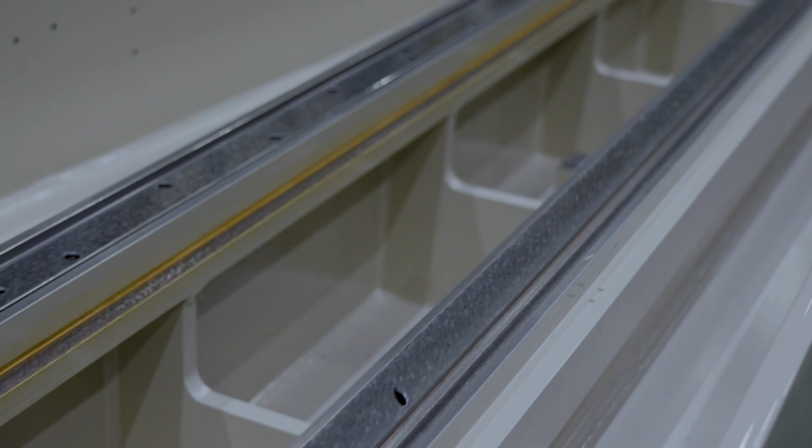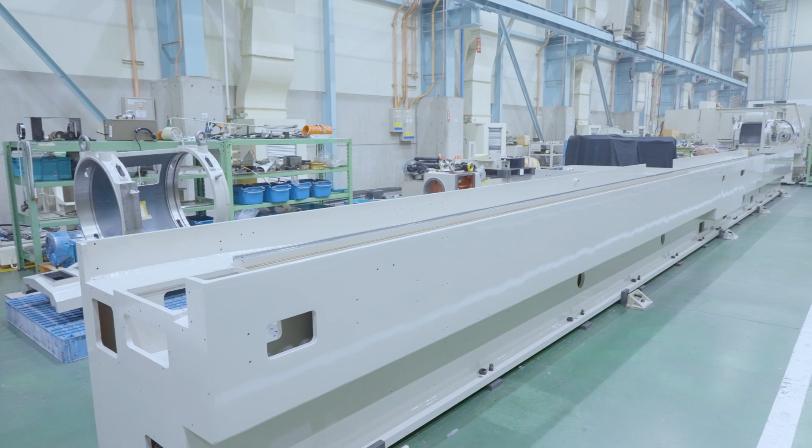The scrape surface seems to go on forever. This is the GSE 500A thread grinding machine with a sliding surface that is an exceptional 12 meters long. Despite this length, the GSE 500A achieves axis straightness to the micron level.

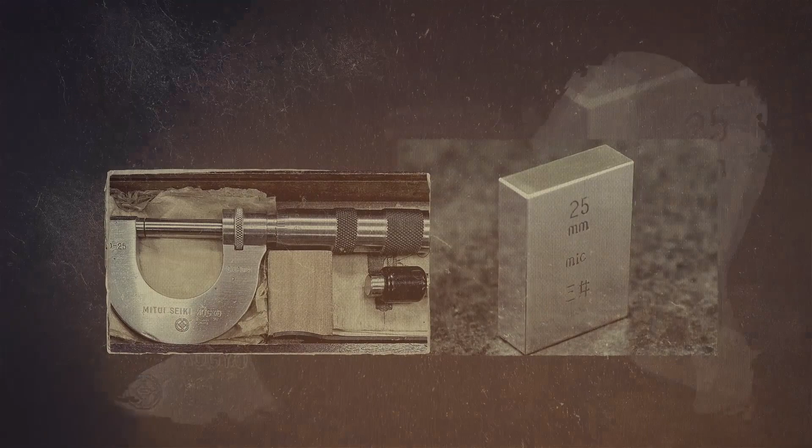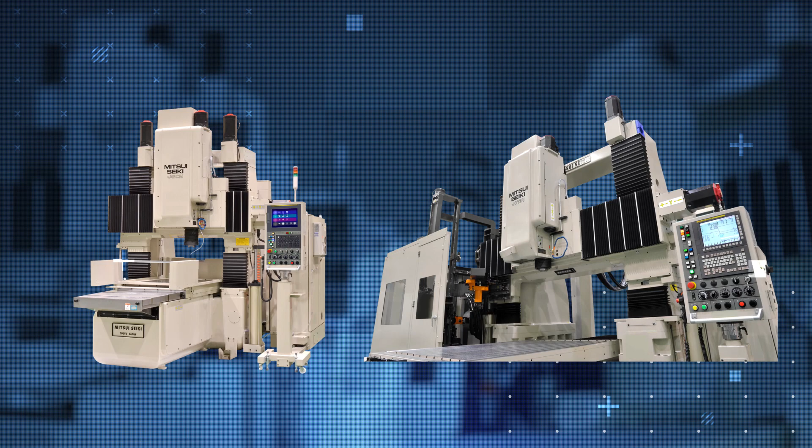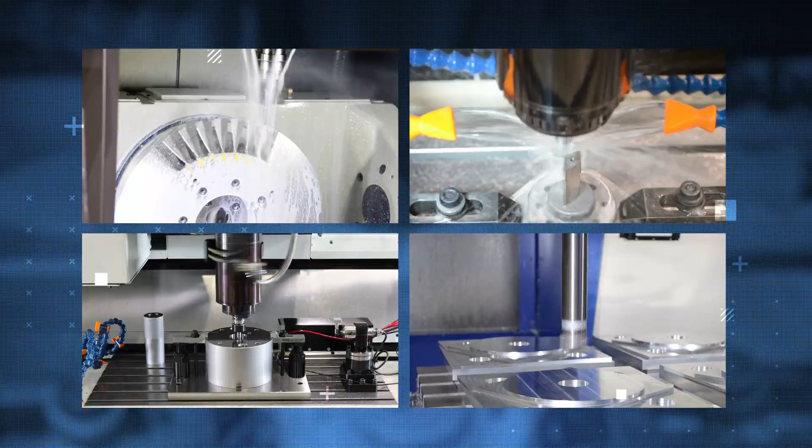MITSUI SEIKI Kogyo Corporation Limited started out producing measuring instruments such as gauge blocks and now produces various types of mother machines, meaning precise machines that facilitate making other precise machines. This includes the world-leading jig borer, the pinnacle of metal cutting machines. How are these mother machines made? Let us introduce our technology and techniques.

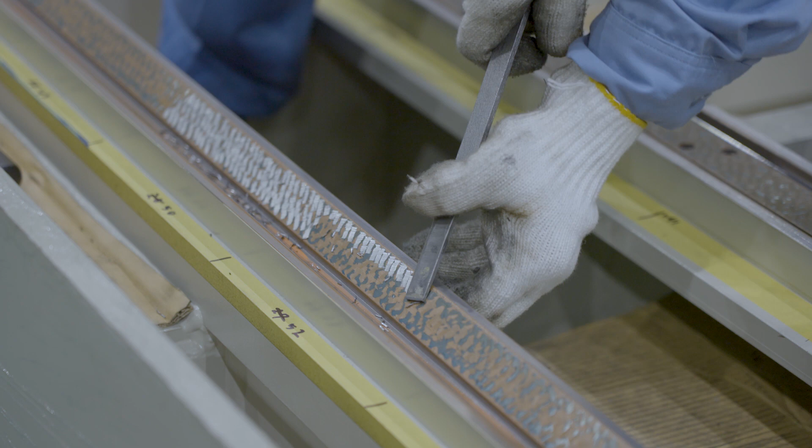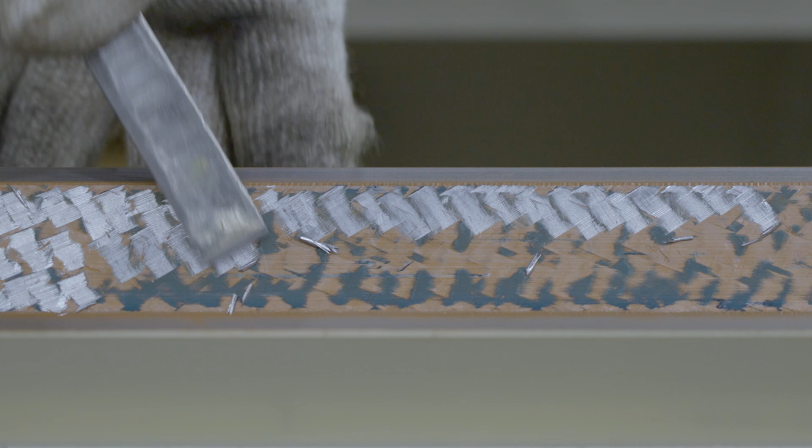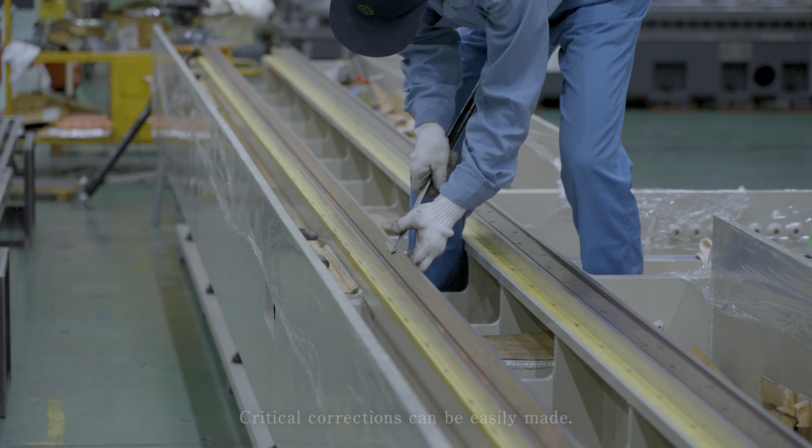Scraping is the process of manual fine machining of the surface of machine components by using a chisel-like tool. The amount that can be removed at one time by scraping is about 1 to 3 micrometers. As we know exactly how much material needs to be removed, we can precisely create any shape. Unlike conventional machining, the major benefit of the hand scraping process is critical accuracy corrections.

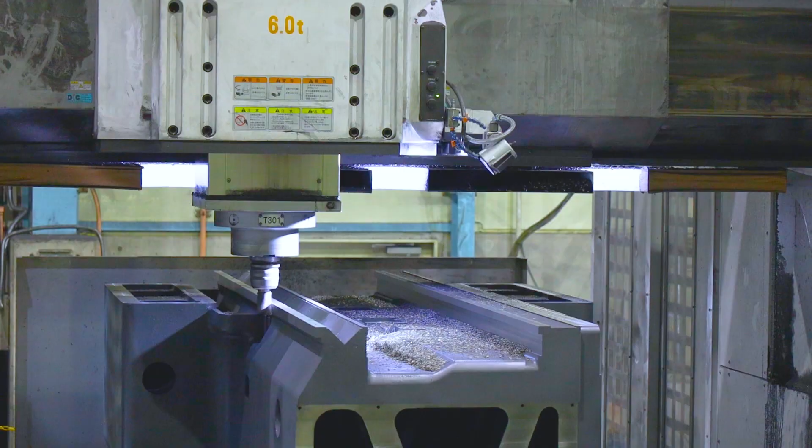Simply saying, the reason for performing scraping is to create components that are better than the machine that made it. The precision of a part cannot exceed the precision of the machine that processes it. Only by applying the human skill of hand scraping is it possible to create something that exceeds the precision of the processing machine.

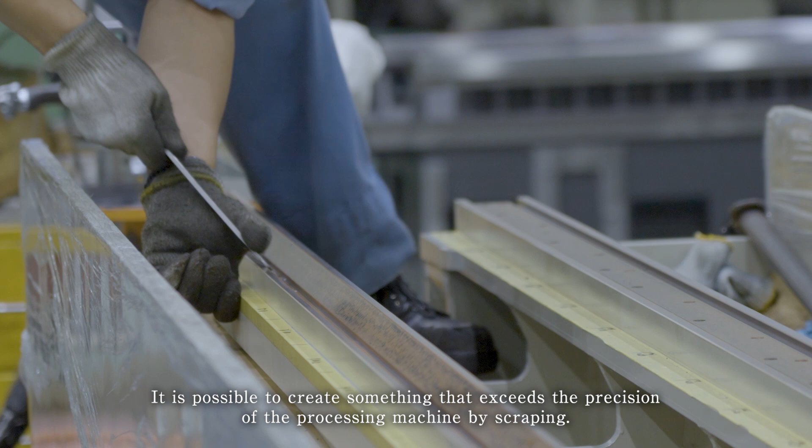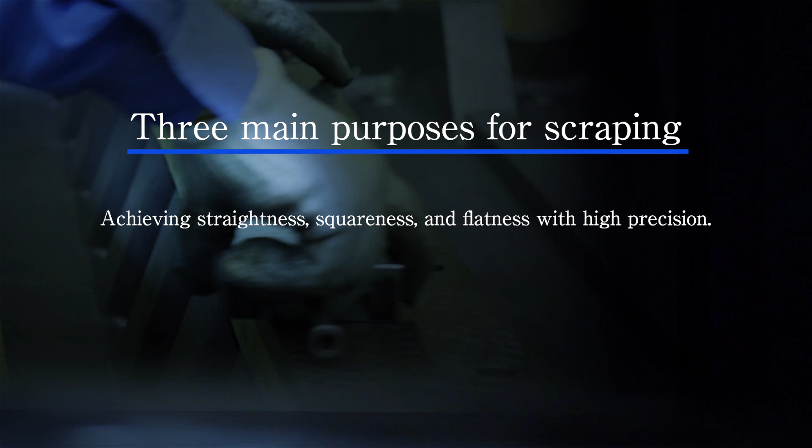There are 3 main purposes for scraping: achieving straightness, squareness, and flatness of sliding surfaces with high accuracy; creating a surface that takes deformation into consideration to accommodate displacement due to the weight of the parts placed on it; and creating surfaces that allow parts to be joined together without deformation when these are joined together.

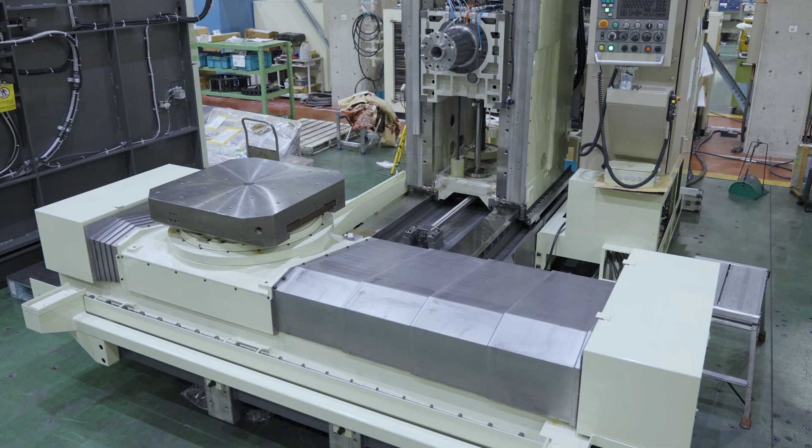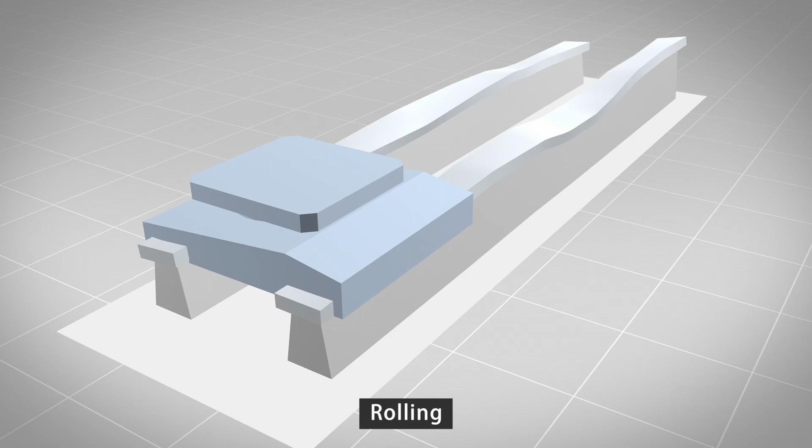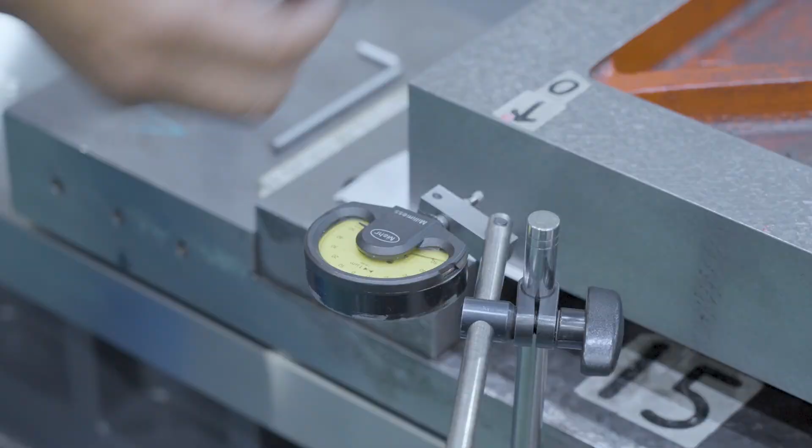When an object, such as a table, saddle, or column, moves on a linear axis, there are slight differences in posture in the up-down, left-right, and front-back directions. If a sliding object, which should normally move in a straight line, moves incorrectly, it cannot be called a high-precision machine. The accuracy of an object moved on a linear axis is determined by the accuracy of the sliding surface. The sliding surfaces of all the machine tools produced by us are hand-scraped to minimize posture differences.

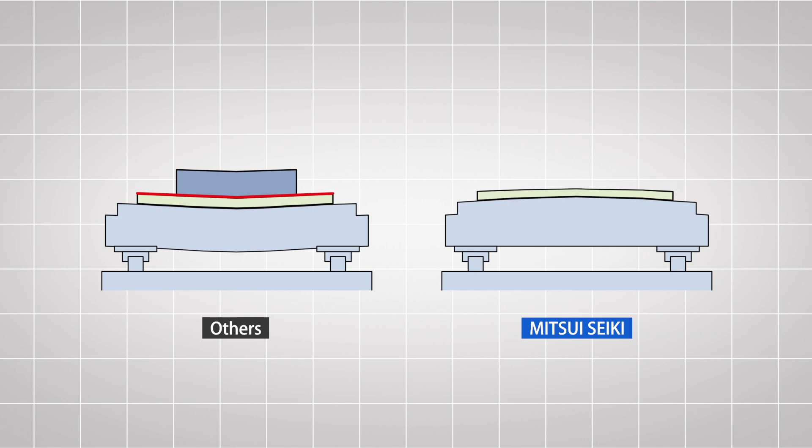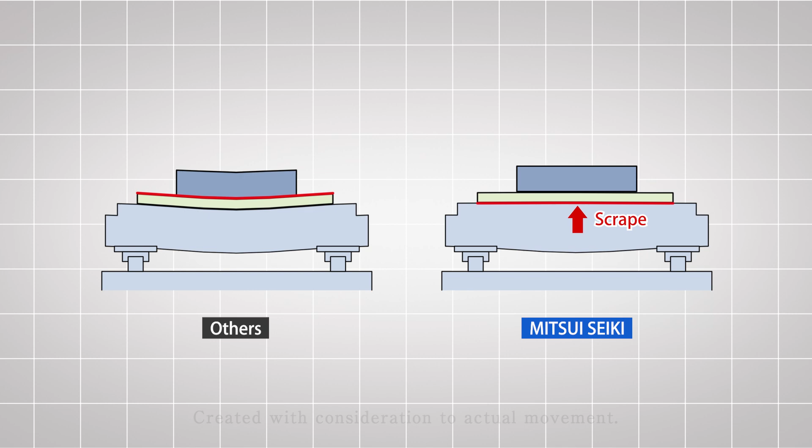If the sliding surface is perfectly straight and a heavy object is moving on top of that sliding surface, the straight surface will then be slightly deformed. By hand scraping a sliding surface with a slight difference in height at the center compared to the ends, the object can then move with the desired straightness.

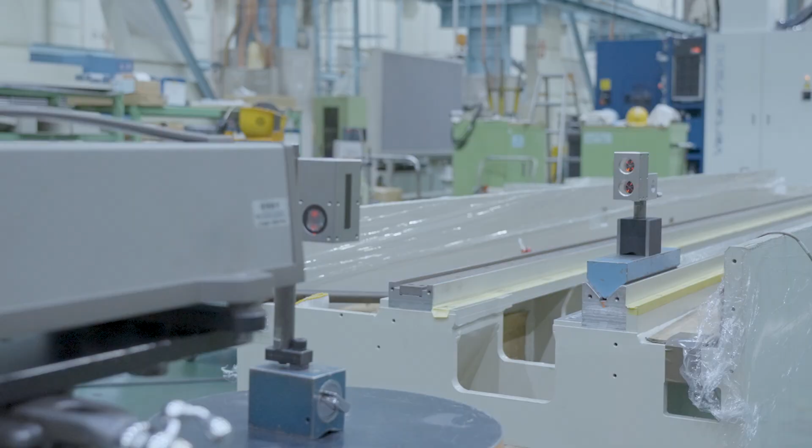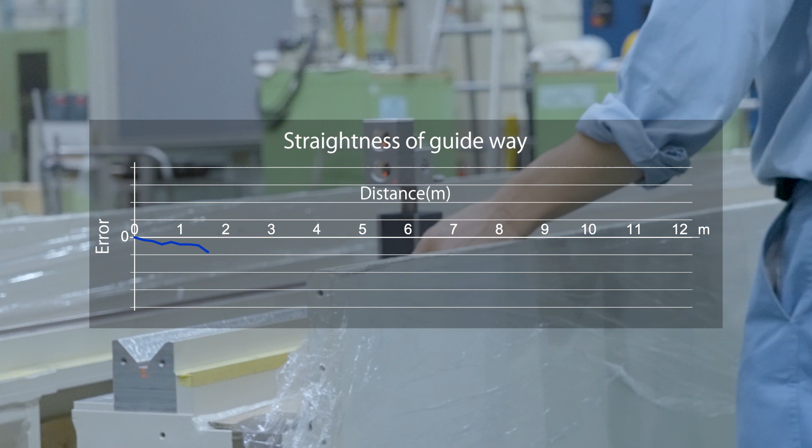A desired curve on the sliding surface is created by scraping, and the results are checked by using an autocollimator or laser measuring device. A mirror placed on the scraped surface is moved at regular intervals, and any slight angular deviation of the mirror is measured with the autocollimator or laser measuring device. All scraped surface straightness deviations are recorded by plotting the angle at each measurement location. Scraping is repeated until the desired curve is achieved. This process is a formidable task, and even more so with longer sliding surfaces.

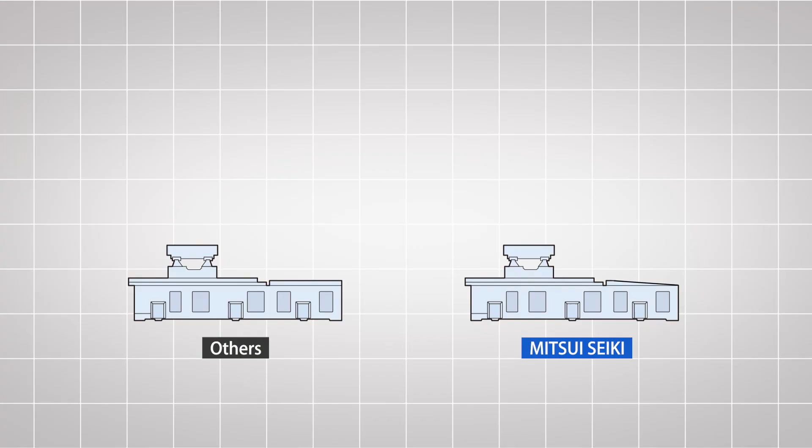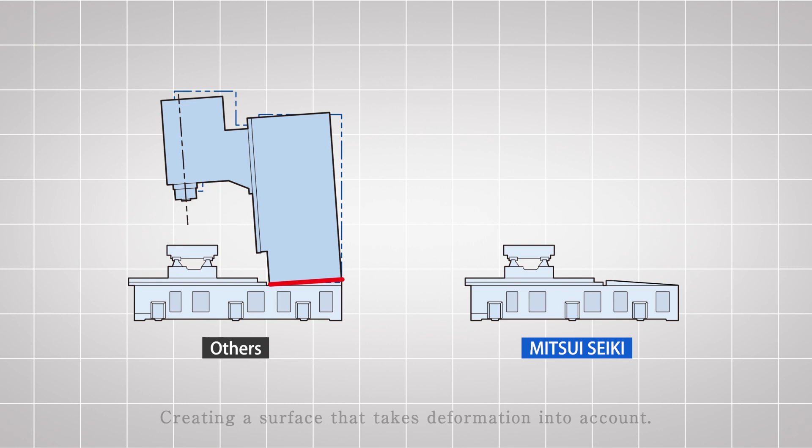When assembling a machine, if unbalanced parts are mounted, the parts which should be perfectly square to each other become slightly out of alignment. By taking this deformation into account in advance, mating surfaces are hand-scraped to obtain proper squareness when assembled.

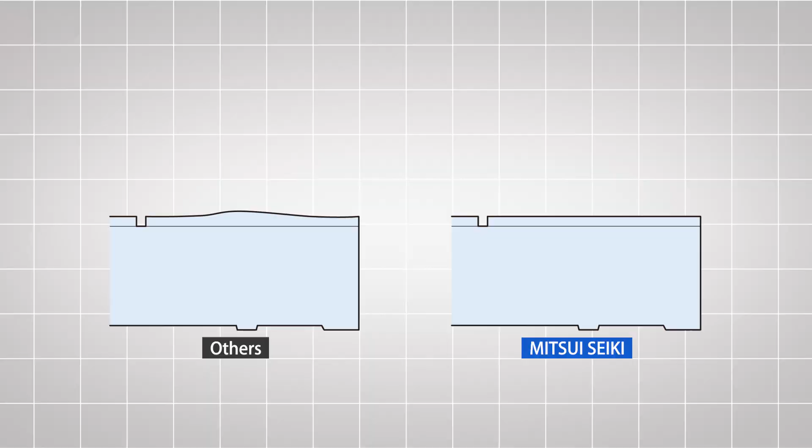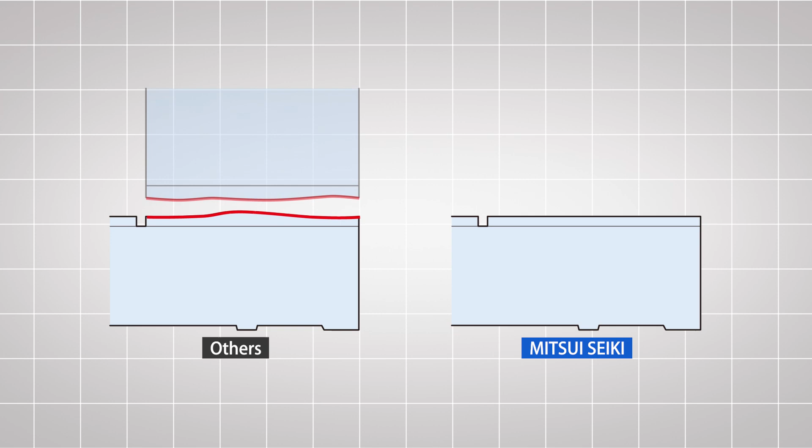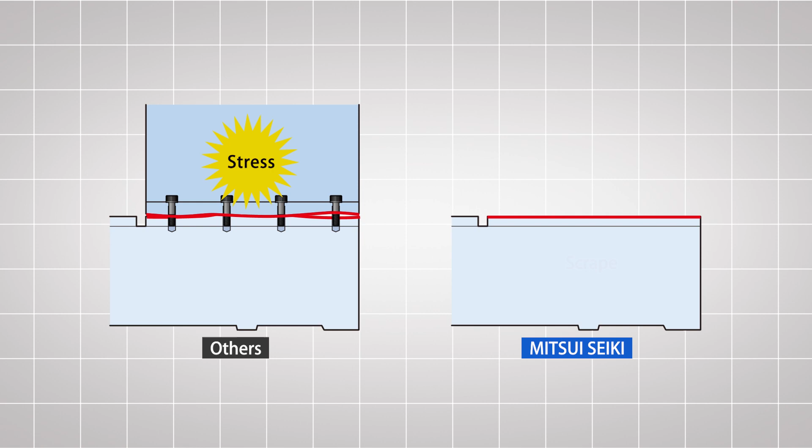Even if the mating surfaces of 2 objects are not flat, these can be forcibly joined by using bolts, etc. However, since there is a residual force that tries to return these parts to their original state, 2 objects become distorted over time. Hand scraping surfaces flat prior to assembly will eliminate the mating stress and permit stable precision over time. This allows our products to maintain high accuracy over long periods of time.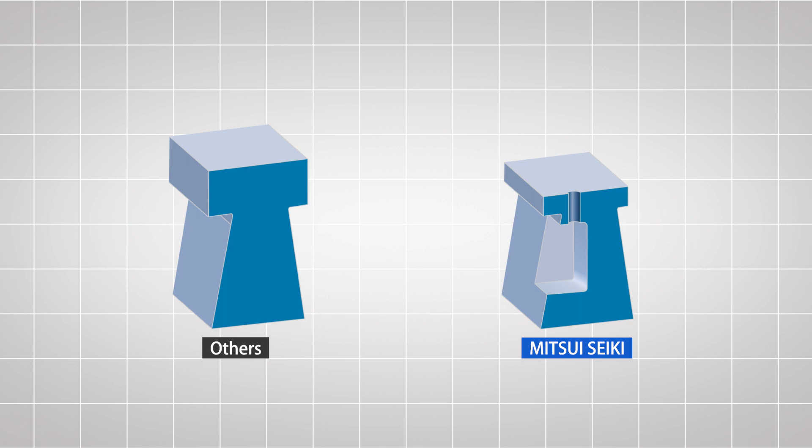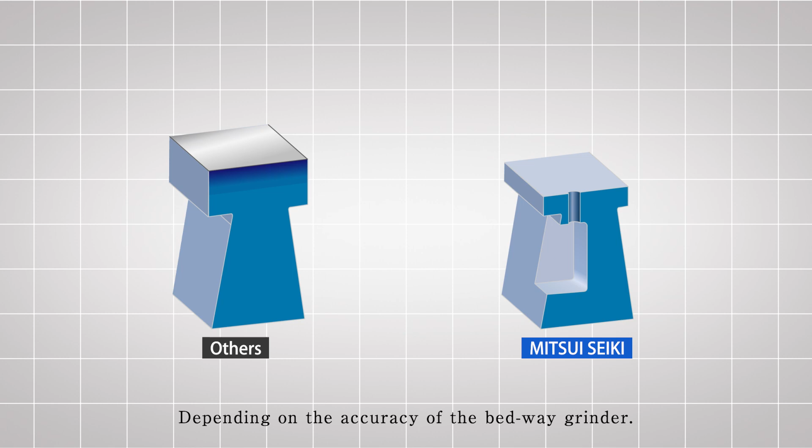This is a brief comparison between the generally used method and our standard practice to produce machine tool slideways. The common method is to heat treat the specific slideway surfaces of a casting to increase hardness, and then process it with a large slideway grinder to create a sliding surface. In this process, the accuracy of the sliding surface depends entirely on the accuracy of the slideway grinder. Additionally, durability of the ground cast iron is limited because the hardness of the guide surface is low.

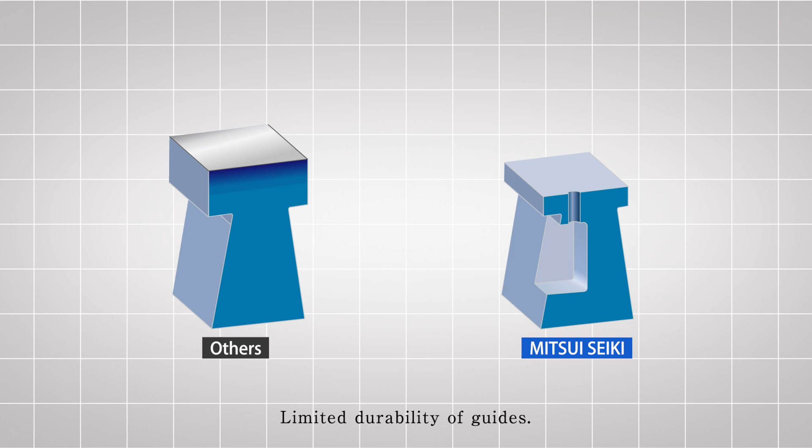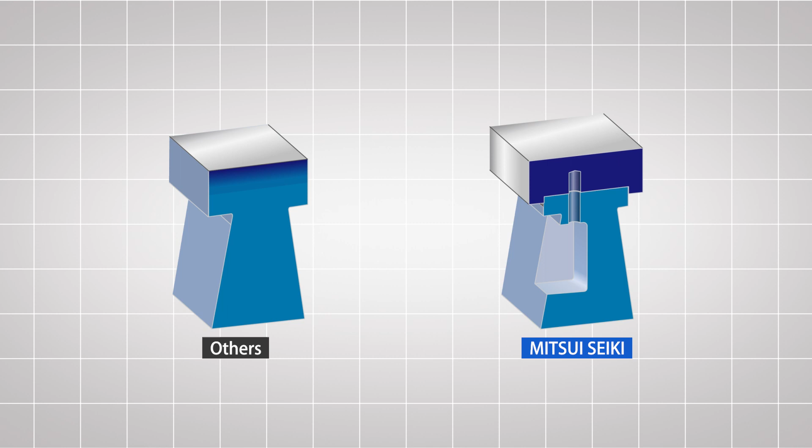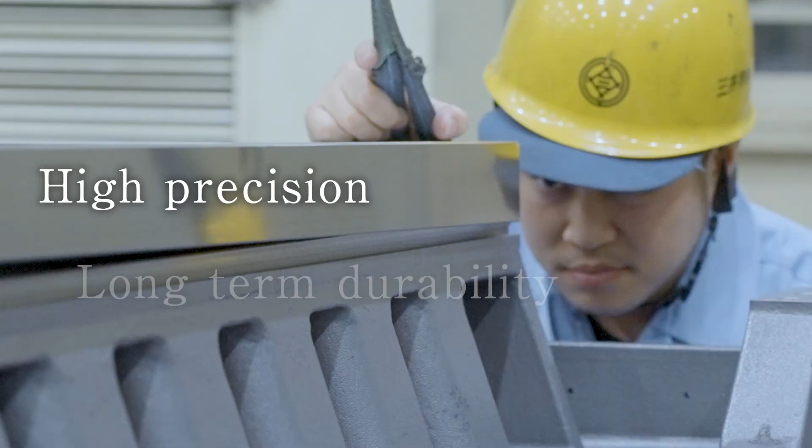On the other hand, we scrape the cast iron mounting surface of the casting to the desired shape and accuracy first. We then install precision hardened and ground steel guide rails to this accurate surface. For box-type slideways, these are always mounted from the backside, away from the sliding components. In addition to the initial accuracy, box-type slideways has sufficient hardness, so it is resistant to wear and can maintain the accuracy over a long period of time.

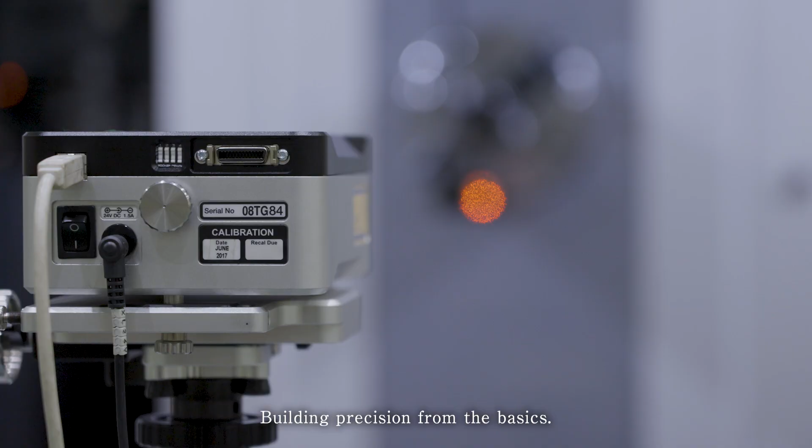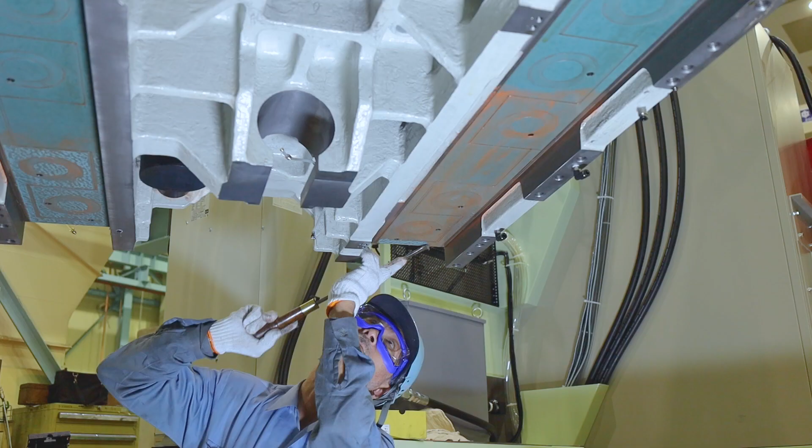Our ongoing policy is to build up the machine's total precision from the basics. Even with this approach, when the machine is finally assembled and its accuracy checked, there may be slight errors. We will not compromise on even the smallest deviation. The machine units are disassembled, and the sliding surfaces are re-scraped to make fine adjustments to achieve the final 1 micrometer accuracy.

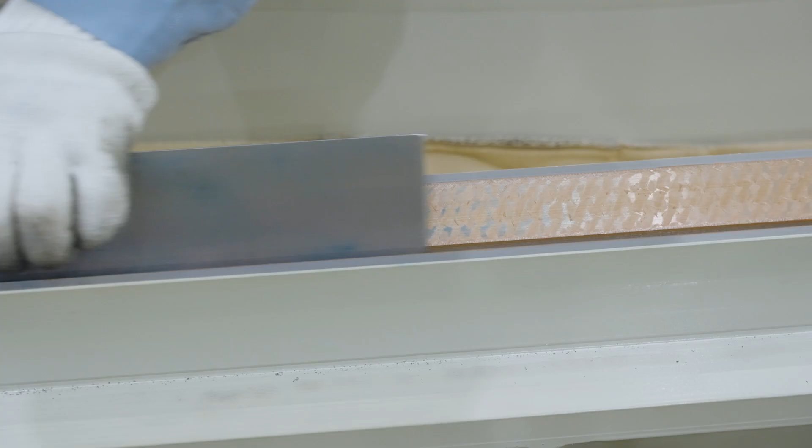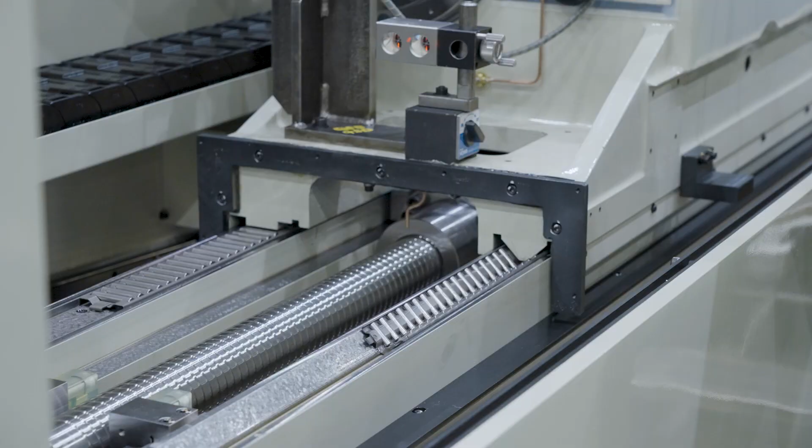Hand scraping is an old technique that has been around since the dawn of machine tools. Even with today's highly developed technology, there is nothing which can surpass it for ultimate mechanical geometry. We will continue to cherish our scraping technique and skill, as it is indispensable in creating mother machines of the highest precision.